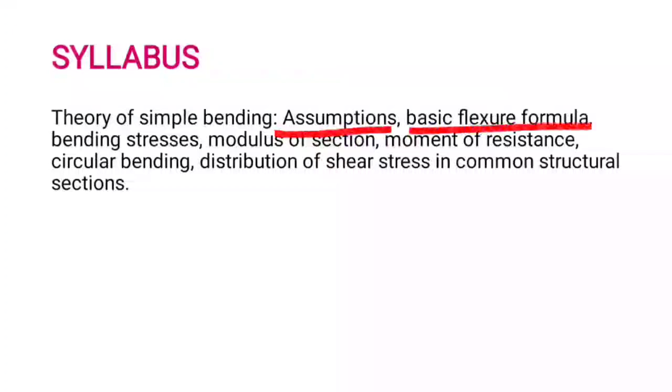ఈరోజు క్లాసులో మనం స్ట్రెంత్ ఆఫ్ మెటీరియల్స్కి సంబంధించి థియరీ ఆఫ్ సింపుల్ బెండింగ్ అనే టాపిక్ని చూద్దాం. ఈరోజు క్లాసులో మనం డిస్కస్ చేసుకునే సిలబస్ ఏంటంటే అజంప్షన్స్, బేసిక్ ఫ్లెక్చర్ ఫార్ములా, బెండింగ్ స్ట్రెస్సెస్, మోడ్యులస్ ఆఫ్ సెక్షన్, మొమెంట్ ఆఫ్ రెసిస్టెన్స్, సర్క్యులర్ బెండింగ్, డిస్ట్రిబ్యూషన్ ఆఫ్ షియర్ స్ట్రెస్ ఇన్ కామన్ స్ట్రక్చరల్ సెక్షన్స్.

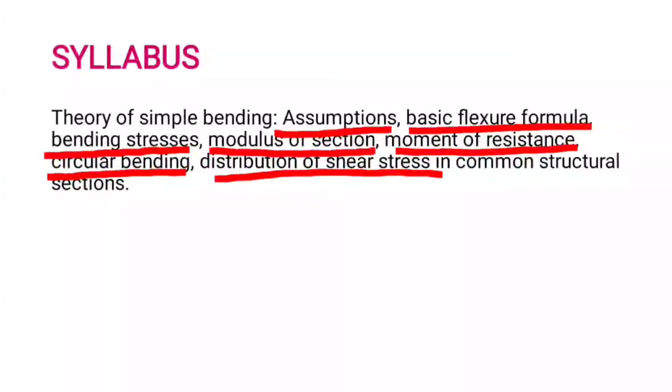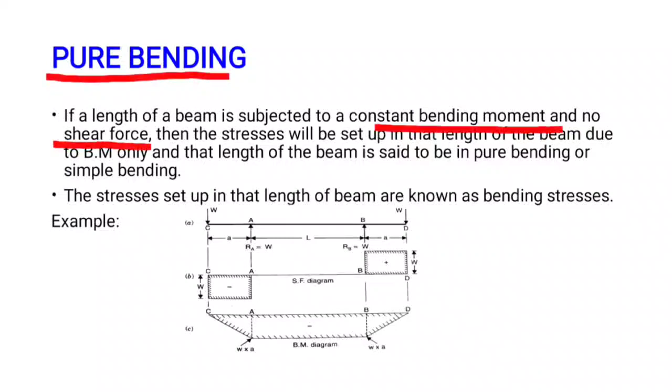అజంప్షన్స్కి వెళ్ళే ముందు ప్యూర్ బెండింగ్ అంటే ఏంటో తెలుసుకుందాం. ఇఫ్ ఏ లెంత్ ఆఫ్ బీమ్ ఈజ్ సబ్జెక్టెడ్ టు ఏ కాన్స్టెంట్ బెండింగ్ మొమెంట్ అండ్ నో షియర్ ఫోర్స్, that is shear force is 0, bending moment is constant, then the stresses will be set up in that length of beam due to bending moment only. ఆ పర్టికులర్ లెంత్ ఆఫ్ బీమ్లో మనకి స్ట్రెస్సెస్ అనేటివి బెండింగ్ మూమెంట్ వల్ల మాత్రమే డెవలప్ అవుతాయి, షియర్ ఫోర్స్ వల్ల డెవలప్ కావు, ఎందుకంటే ఆ పర్టికులర్ లెంత్ ఆఫ్ బీమ్లో షియర్ ఫోర్స్ అనేది 0. దట్ లెంత్ ఆఫ్ బీమ్ ఈజ్ సెడ్ టు బీ ఇన్ ప్యూర్ బెండింగ్ ఆర్ సింపుల్ బెండింగ్.

ఆ పర్టికులర్ లెంత్ ఆఫ్ బీమ్ని ఏమని చెప్తామంటే ప్యూర్ బెండింగ్ కండిషన్లో ఉంది లేదా సింపుల్ బెండింగ్ కండిషన్లో ఉందని చెప్తాం. స్ట్రెస్సెస్ అనేటివి మనకు బెండింగ్ మూమెంట్ వల్ల మాత్రమే డెవలప్ అవుతున్నాయి కాబట్టి వాటిని మనం బెండింగ్ స్ట్రెస్సెస్ అని అంటున్నాం.

ప్యూర్ బెండింగ్కి ఒక ఎగ్జాంపుల్ తీసుకుందాం. ఒక ఓవర్ హ్యాంగింగ్ బీమ్ తీసుకుందాం. ఓవర్ హ్యాంగింగ్ పార్ట్లో ఎడ్జెస్లో వచ్చేసరికి డబ్ల్యూ అనే లోడ్ యాక్ట్ అవుతుంది బోత్ సైడ్స్. ఆ లోడింగ్ కండిషన్కి మనం షియర్ ఫోర్స్ డయాగ్రామ్ అండ్ బెండింగ్ మూమెంట్ డయాగ్రామ్ గా ప్లాట్ చేసినట్లయితే ఇన్ ద పోర్షన్ ఏబి ద షియర్ ఫోర్స్ ఈజ్ 0, and the same portion AB for the same loading condition the bending moment is constant. So we say that the length of portion AB is under pure bending condition or simple bending condition.

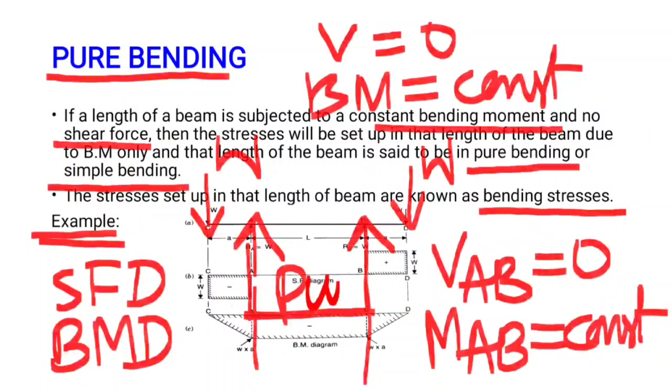అని చెప్తాం అన్నమాట. Next we see assumptions. The first assumption is the material of the beam is homogeneous and isotropic.

ఓకే, ఈ వర్డ్స్ అనేటివి మనము ఫ్రీక్వెంట్గా వింటూ ఉంటాం అన్నమాట. వాటిని అంటే హోమోజీనియస్ అంటే ఏంటి, ఐసోట్రోపిక్ అంటే ఏంటో తెలుసుకుందాం. ఎప్పుడు హోమోజీనియస్ అంటాం, ఎప్పుడు ఐసోట్రోపిక్ అంటాం అని కూడా తెలుసుకుందాం. హోమోజీనియస్ ఎప్పుడు అంటామంటే ఏ బాడీ ఈజ్ సెడ్ టు బి హోమోజీనియస్ ఇఫ్ ఇట్ హ్యాస్ ఐడెంటికల్ ప్రాపర్టీస్ at all points in identical directions.

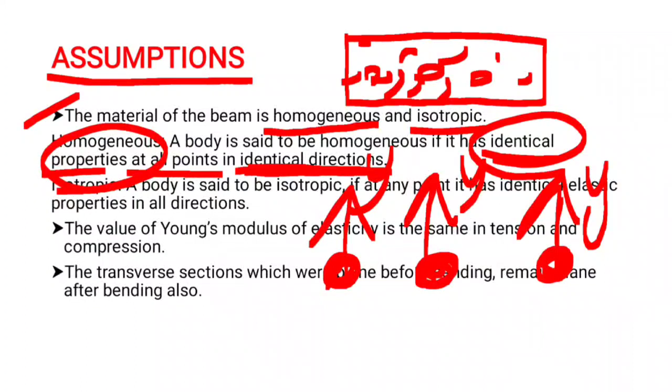Let's say this is a beam, it has a lot of points in it, a body. I consider only 2-3 points, in identical direction, that is I consider a y direction. All points exhibit identical properties, that is similar properties in similar direction. y డైరెక్షన్లో అన్ని పాయింట్స్ ఒకే ప్రాపర్టీని చూపిస్తాయి అన్నమాట. అది ఇప్పుడు x డైరెక్షన్ తీసుకుంటే x డైరెక్షన్లో కూడా ప్రాపర్టీస్ అన్నీ ఆల్ పాయింట్స్ ప్రాపర్టీస్ సేమ్గా ఉంటాయి. z డైరెక్షన్ తీసుకున్నా కానీ ఆల్ ప్రాపర్టీస్ అనేటివి సేమ్ ఉంటాయి. అప్పుడు ఆ బాడీని మనం హోమోజీనియస్ బాడీ అని చెప్తామన్నమాట.

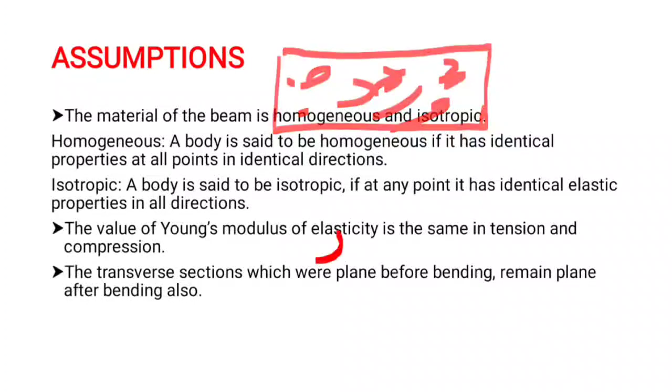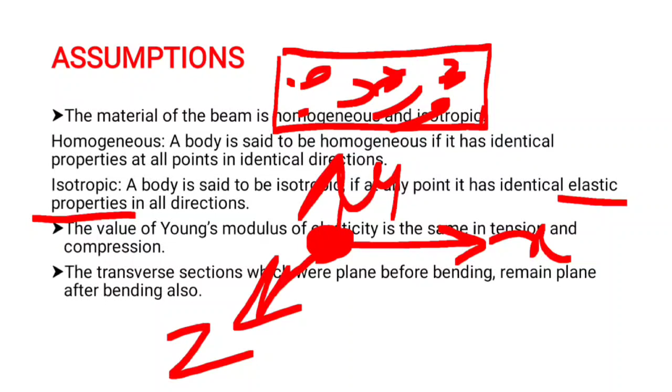ఎప్పుడు ఐసోట్రోపిక్ అంటామంటే, this is a body, it has a lot of points. At any point, I consider elastic properties in all direction, that is x direction and y direction and z direction, the elastic properties is same, then the body is said to be isotropic.

The next assumption is the value of Young's modulus of elasticity is same in tension and in compression, that is E tension, Young's modulus of elasticity in tension is equals to Young's modulus of elasticity in compression.

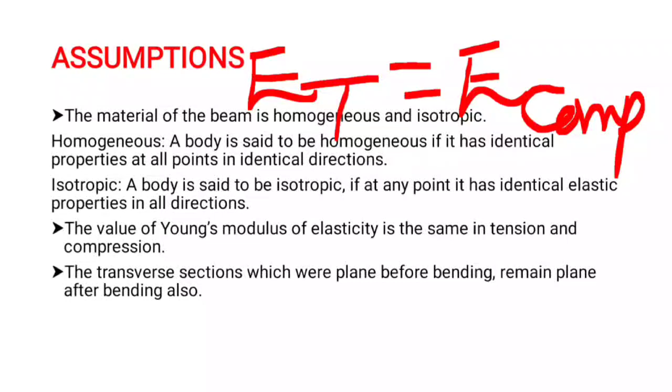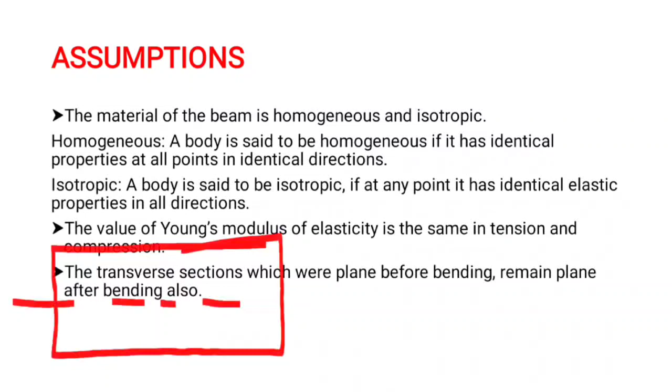The transverse section which were plane before bending remain plane after bending. For the third assumption, better understanding, we draw a figure. This is beam before bending condition, this is a transverse section, it is named as neutral axis. That neutral axis is plane before bending, remain plane after bending also.

This is bending, after bending. After bending, the upper fiber, the topmost fibers undergo compression and the bottommost fibers undergo tension. But the neutral axis is in plane condition only.

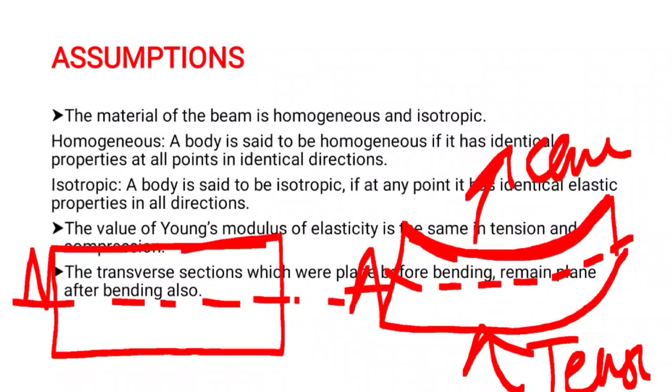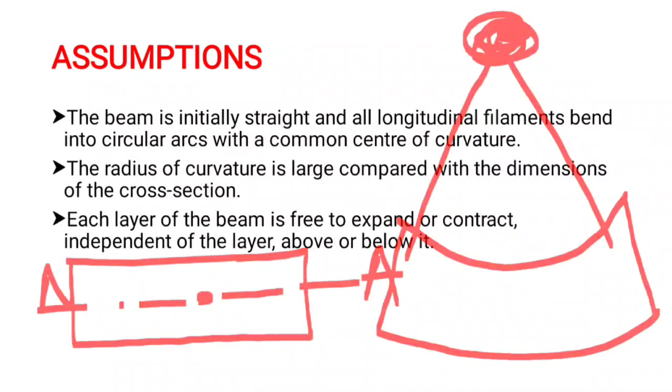The next assumption is the beam is initially straight. This is neutral axis. All longitudinal filaments bend into circular arcs like this, with a common center of curvature. This is common center of curvature. The radius will be r. We consider the radius from the neutral axis.

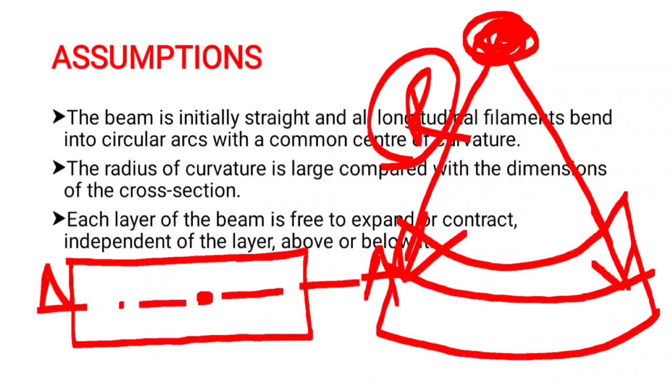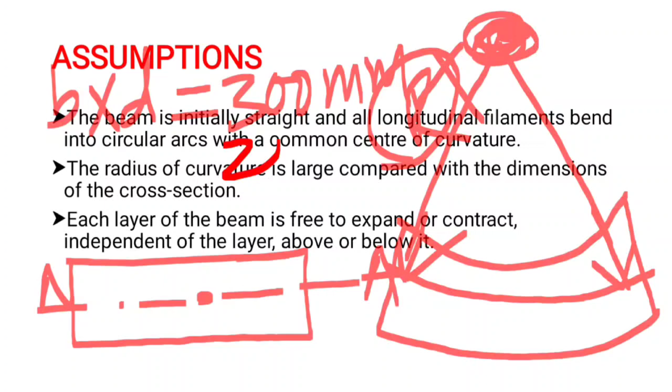The next assumption is the radius of curvature is large compared with the dimensions of the cross section. The beam dimensions, let's say B into D, is equals to 300 mm by 200 mm, but the radius will be 10 meters. Comparing the radius with the dimensions of the beam, radius is very large. That is the assumption made in bending theory.

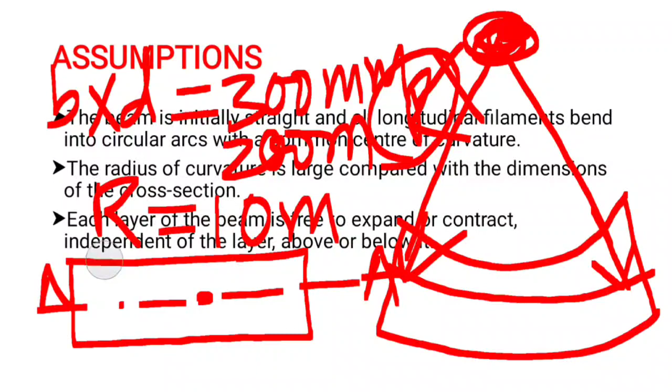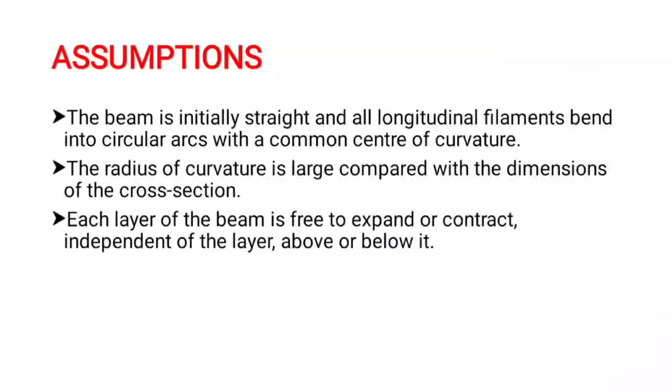The last assumption is each layer of the beam is free to expand or contract independent of the layer above or below it. Let's say this is a beam, this is a transverse section, that is neutral axis.

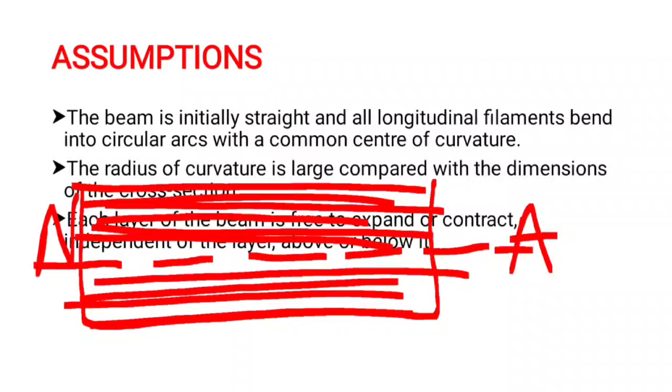The layers above the neutral axis and the layers below the neutral axis are free to expand or contract. They are not dependent on the layers above or below them; they are independent. This is the final assumption made in bending theory.

Next we see the basic flexure formula, the expression for bending theory. The flexure formula is given by M/I = sigma/y = E/R. In some textbooks, they give E/R = M/I = F/Y.

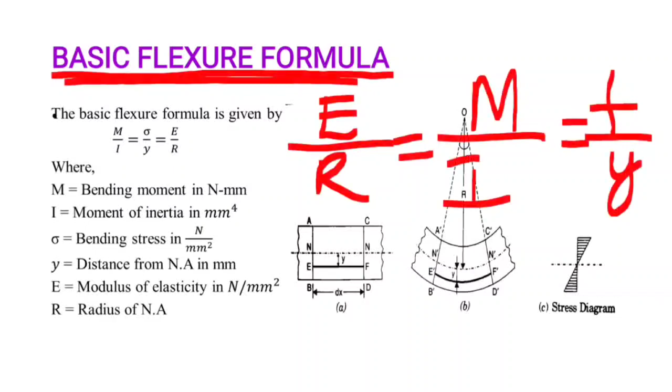Based on the diagrams provided here, this is the beam before bending condition, this is after bending condition, and the stress distribution in the beam section will be like this. Based on the figures provided, the derivation is done, but the derivation is not needed here.

Just remember the formula. A simple trick is given here to remember the formula.

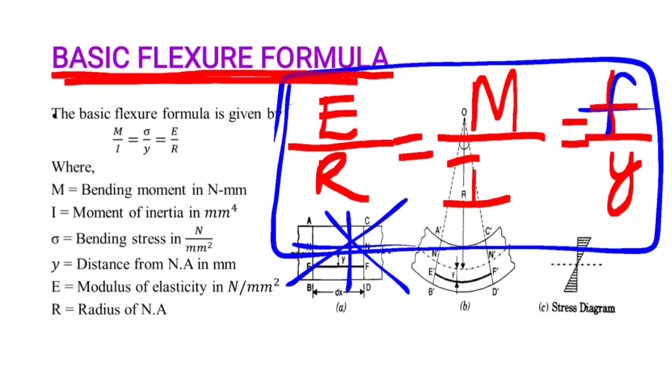For remembering the bending equation, we follow a phrase: E/R = M/I = F/y. In some textbooks F is given, in some sigma is given; anything given is nothing but the bending stress only. For this I give a simple trick: E by R, M by I, F by y. How to remember: Elizabeth Rani, may I follow you. Based on this phrase, we remember the formula: Elizabeth Rani, may I follow you.

Here the term M is bending moment, I is moment of inertia, sigma is bending stress, y is distance from the neutral axis. We observe here, this is the strip, this is the neutral axis, and from the neutral axis we measure the distance y. E is modulus of elasticity in Newton per mm square, and R is radius, this is radius.

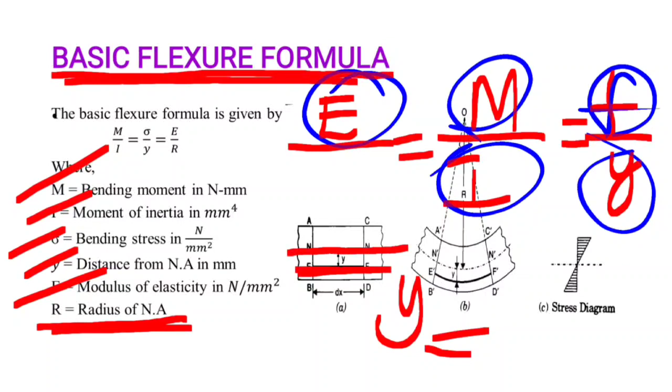Next we see bending stresses.

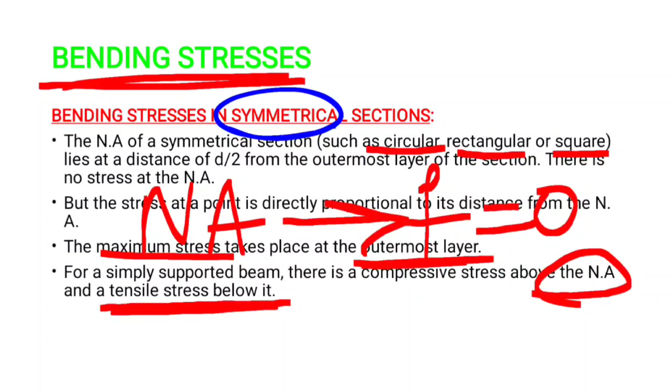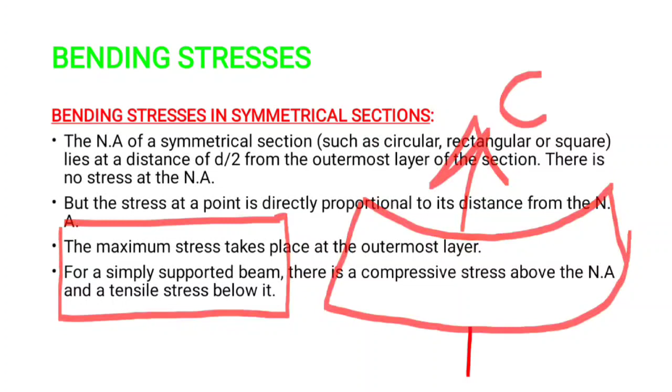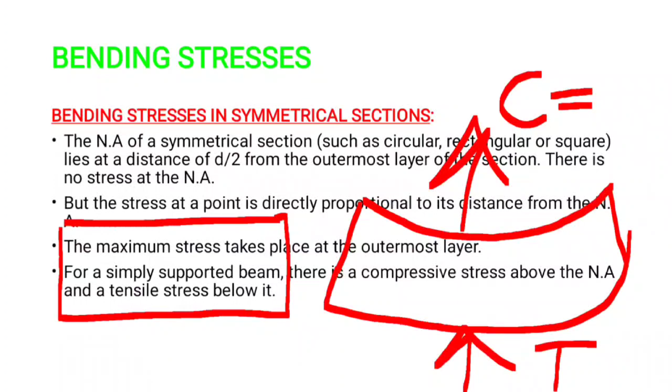Why? Because we see the bending phenomenon: this is before bending, this is after bending. The topmost fibers undergo compression, the bottommost fibers undergo tension. That's why at the top compressive stresses are developed and at the bottom tensile stresses are developed.

Let's see, this is a simply supported beam. We draw the stress distribution: this is compression, this is tension.

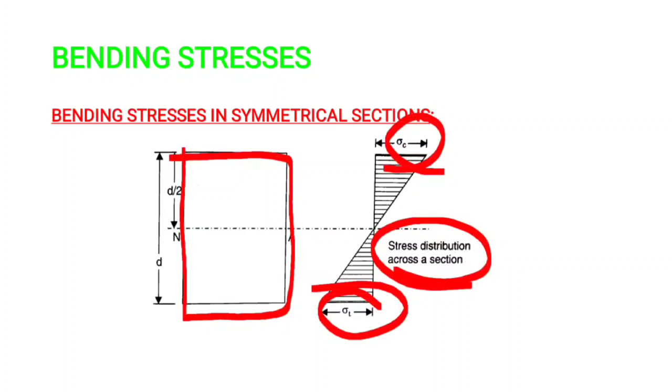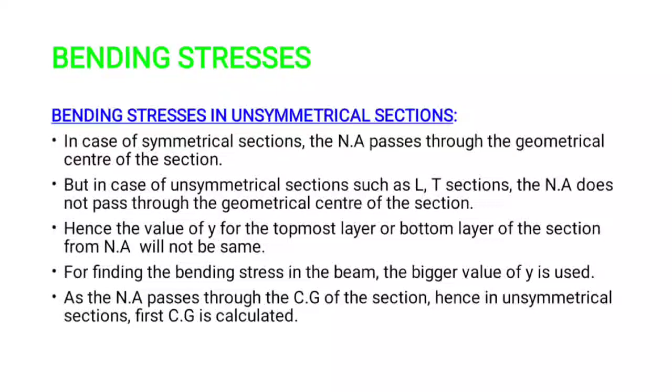Hence the value of y for the topmost layer and bottommost layer from the neutral axis will not be the same. Ymax remains the same in symmetrical sections, but in unsymmetrical sections Ymax changes and is not constant. For finding the bending stresses in the beam, the bigger value of y is used, that is Ymax.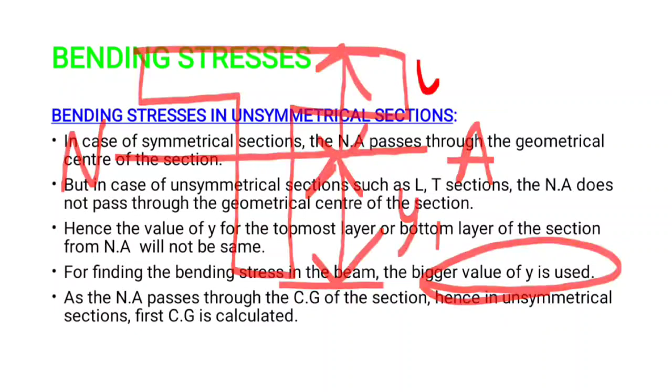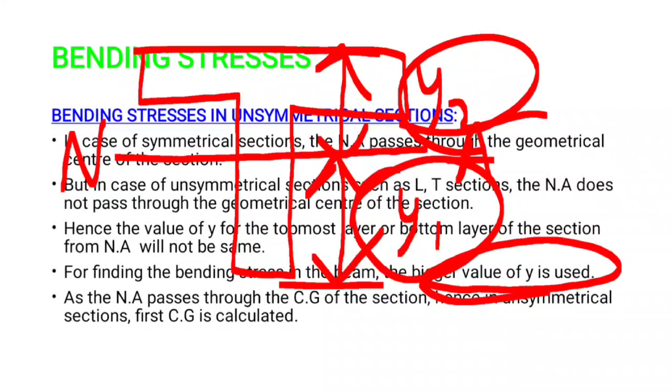We calculate, let's say this is a T section, this is the neutral axis, this is y1 and this is y2. Among these two, y1 or y2, whichever is maximum, we use that value to find the bending stresses in unsymmetrical sections.

అదే సిమెట్రికల్ సెక్షన్స్‌లో మనకు ఆ ప్రాబ్లం ఏమి ఉండదు. మనం కన్సిడర్ చేసేది y మ్యాక్సిమం, ఎందుకంటే న్యూట్రల్ యాక్సిస్ అనేది d/2 డిస్టెన్స్‌లో పాస్ అవుతుంది కాబట్టి ఎలాంటి ప్రాబ్లం ఉండదు. d/2 అబౌవ్, d/2 బిలో d/2 అనేది మనకు y max వాల్యూ వస్తుంది.

As the neutral axis passes through the center of gravity of the section, hence in unsymmetrical sections, first CG is calculated. First మనం సెంటర్ ఆఫ్ గ్రావిటీని కనుక్కున్న తర్వాత మనము y వాల్యూని కనుక్కొని, దెన్ we find the bending stresses.

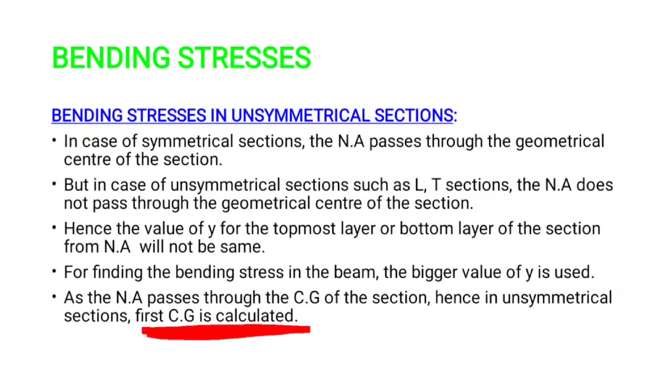సెక్షన్ మాడ్యులస్ అంటే ఏంటి చూద్దాం. సెక్షన్ మాడ్యులస్ ఎలా డిఫైన్ చేస్తామంటే, ఇట్ ఈస్ ద రేషియో ఆఫ్ మొమెంట్ ఆఫ్ ఇనర్షియా ఆఫ్ సెక్షన్ అబౌట్ న్యూట్రల్ యాక్సిస్ టు ద డిస్టెన్స్ ఆఫ్ అవుటర్‌మోస్ట్ లేయర్ ఫ్రమ్ ద న్యూట్రల్ యాక్సిస్. ఇట్ ఈస్ డినోటెడ్ బై ద సింబల్ Z.

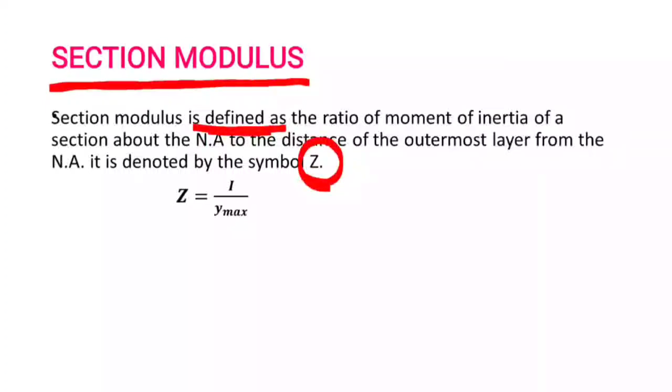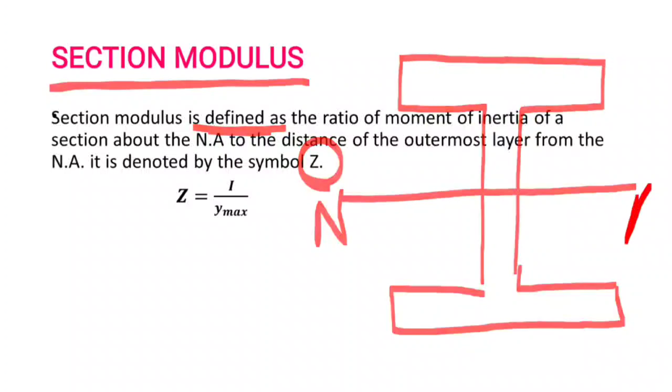ఇట్ ఈస్ నథింగ్ బట్ లెట్స్ సే ఐ సెక్షన్ తీసుకుందాం అనుకోండి. ఇట్ ఈస్ ఎ సిమెట్రికల్ ఐ సెక్షన్. For the symmetrical I section, the neutral axis is passing through the center of gravity only. This is d by 2. This d by 2 is y max. Okay, for the I section, first we calculate the moment of inertia.

We know how to calculate the moment of inertia. moment of inertia ని ఏ విధంగా కనుక్కోవాలో మనం లాస్ట్ క్లాసెస్‌లో చూసాం. మనకు moment of inertia ని కనుక్కోవడం తెలుసు. y max అనేది d by 2. మనం z కనుక్కోవాలంటే I by y max వేస్తే మనకు సెక్షన్ మాడ్యులస్ వాల్యూ వస్తుంది.

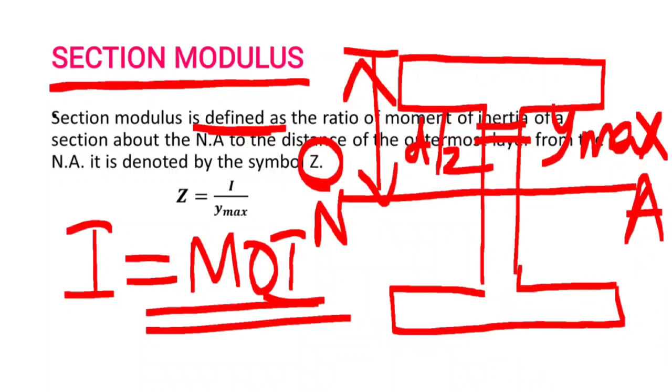సెక్షన్ మాడ్యులస్ అనేది కొన్ని సెక్షన్స్‌కి ఏ విధంగా చేంజ్ అవుతుందో చూద్దాం. ఫస్ట్ వచ్చేసి రెక్టాంగులర్ సెక్షన్‌కి. రెక్టాంగులర్ సెక్షన్ ఇది అనుకోండి, డైమెన్షన్స్ బ్రెడ్త్ b, డెప్త్ d. మనము మొమెంట్ ఆఫ్ ఇనర్షియా కనుక్కునేటప్పుడు ఫార్ములా రెక్టాంగులర్ సెక్షన్‌కి bd³/12 అని చెప్పుకున్నాం.

ఓకే, y max వచ్చేసి d by 2. So bd³/12 divided by d by 2, we get bd²/6. This is the section modulus for rectangular section.

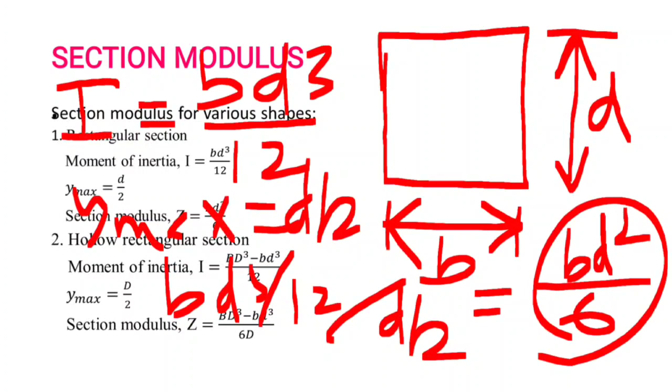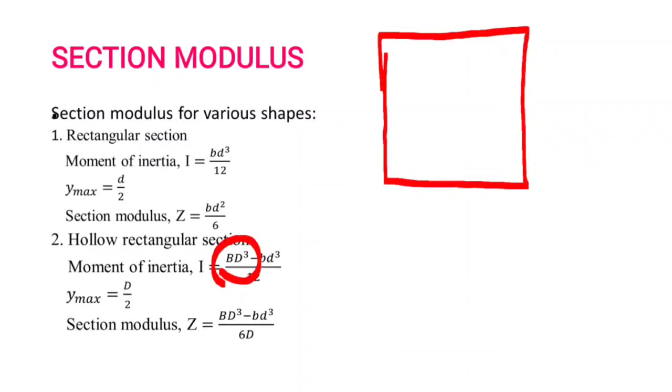Similarly, for hollow rectangular section, we calculate section modulus. I value will be BD³ minus bd³/12. This is capital, let's say this is hollow, right? Outermost dimensions are capital B, this is capital D. This value will be small b, this value will be small d.

We did not consider the hollow portion, we consider only the solid portion. That's why moment of inertia we calculated for the solid portion, we remove the hollow portion. Moment of inertia will be BD³ minus bd³ divided by 12. Y max will be capital D by 2. Section modulus will be I by y max. We get BD³ minus bd³ divided by 6D as the section modulus for hollow rectangular section.

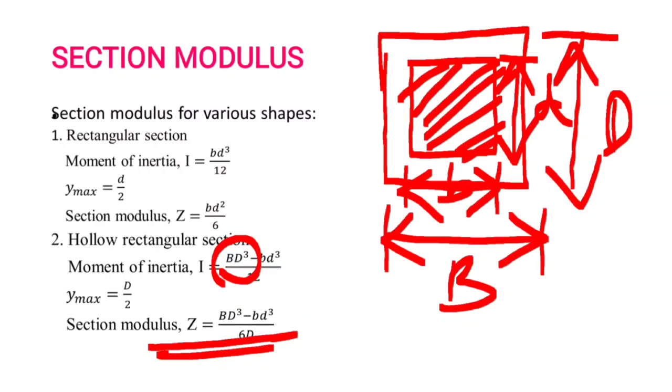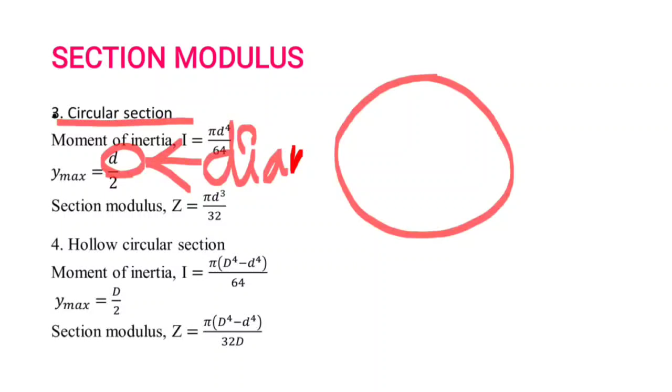Next we see the circular section. In the rectangular section, D refers to the depth; in this case, D refers to the diameter. For the circular section, d is the diameter of the circle. Then the moment of inertia, we know that moment of inertia is equal to pi d power 4 by 64.

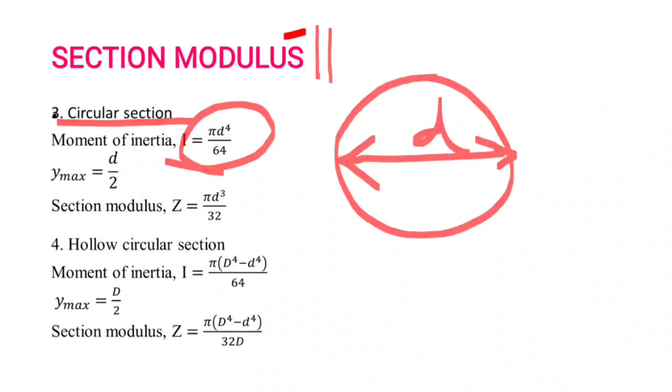Y max will be d by 2. Section modulus z is equal to I by y max, that is equal to pi d power 4 divided by 64 divided by d by 2. We get pi d³/32 is the section modulus z value for the circular section.

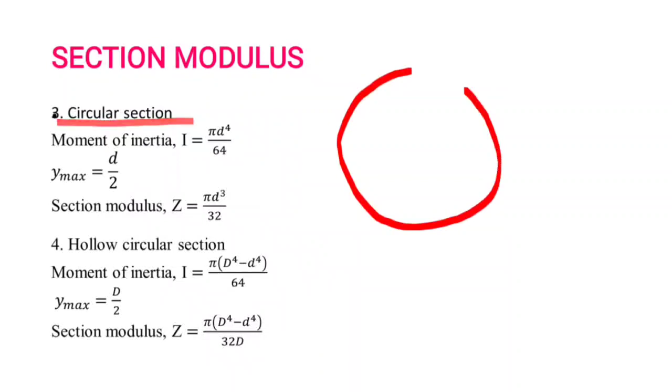In case of hollow circular section, in the same manner as hollow rectangular section, we calculate. This is the circle, this is another circle. This diameter will be small d, this diameter will be capital D. The moment of inertia will be pi times capital D power 4 minus small d power 4 divided by 64.

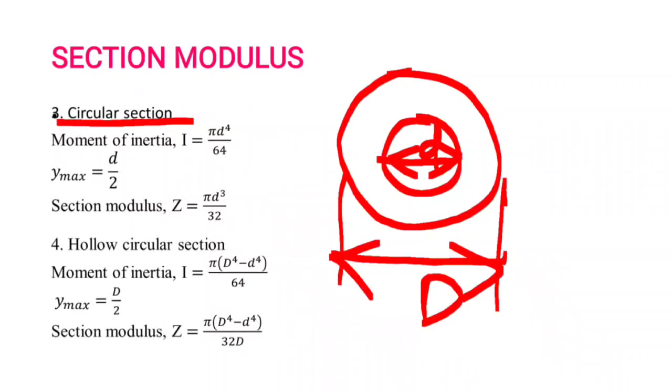Y max will be large diameter, that is capital D, divided by 2. The section modulus will be z is equal to I by y max. We get pi times D power 4 minus small d power 4 divided by 32D.

Okay, next we see strength of a section. Strength of section is nothing but moment of inertia, moment of resistance. Moment of resistance offered by the section is given by,

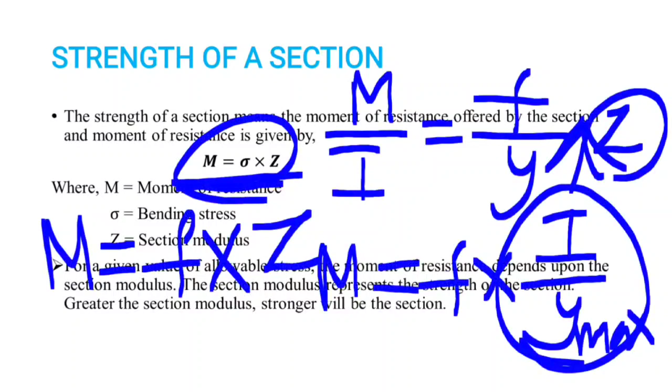we have the equation as m by I is equal to f by y. So m is equal to f into I by y. If y is maximum, then it is called as section modulus. Then the moment of resistance is given by bending stress times section modulus. This is the formula. I hope the formula is clear, where m is moment of resistance, sigma or f is bending stress, z is section modulus.

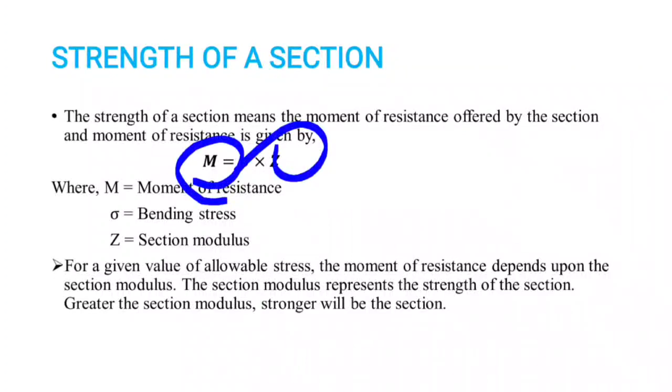For a given value of allowable stress, the moment of resistance depends on the section modulus. The section modulus represents the strength of section. Greater the section modulus, stronger will be the section. This is directly proportional, so if Z is more, the strength, that is moment of resistance, is more.

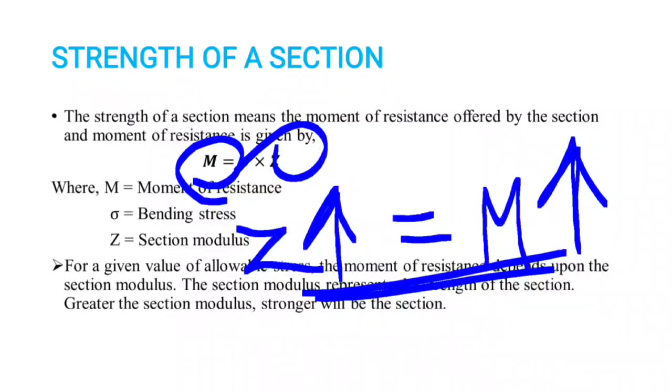Next we see shear stress. Shear stress produced in a beam which is subjected to shear force is known as the shear stresses.

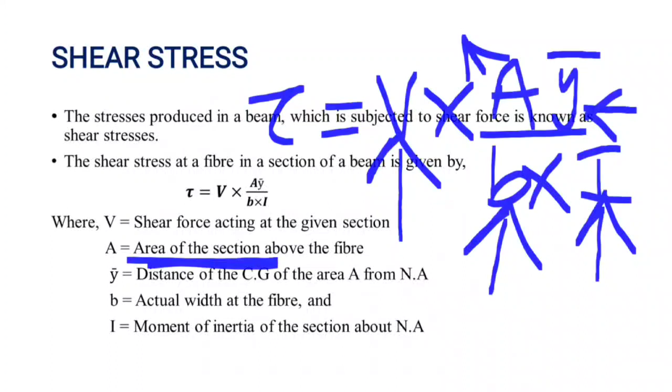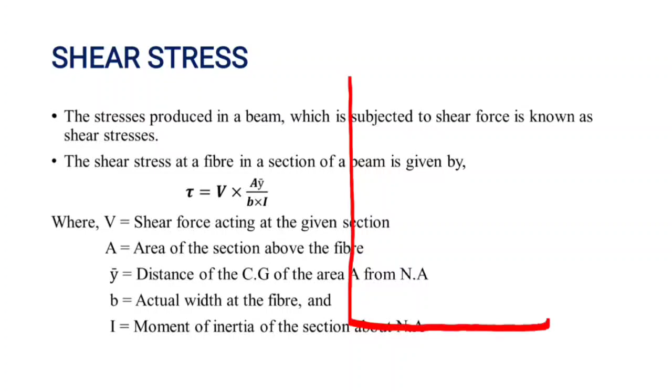Let's say this is a rectangular section. This is the center of gravity. I consider this portion, and the area of the section above the fiber is the area we consider. Y-bar is the distance from this center of gravity to the hatched area's center of gravity. This is the basic formula for shear stress.

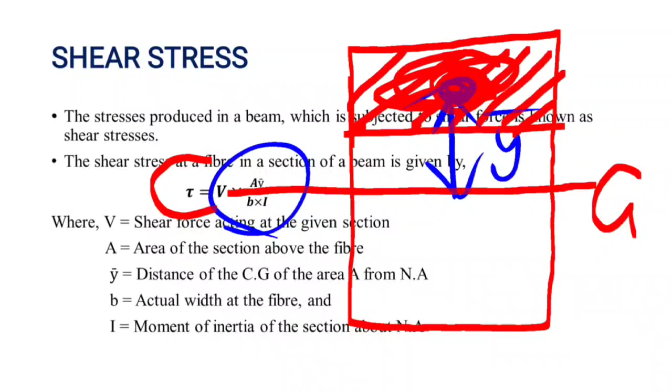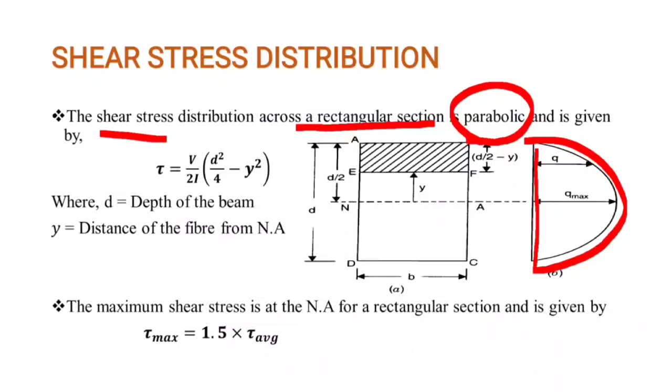We see some common sections. First, the shear stress distribution for a rectangular section. In the rectangular section, the shear stress distribution is parabolic. The formula is given by tau equals V by 2I times d square by 4 minus y square. This is the formula for a rectangular section.

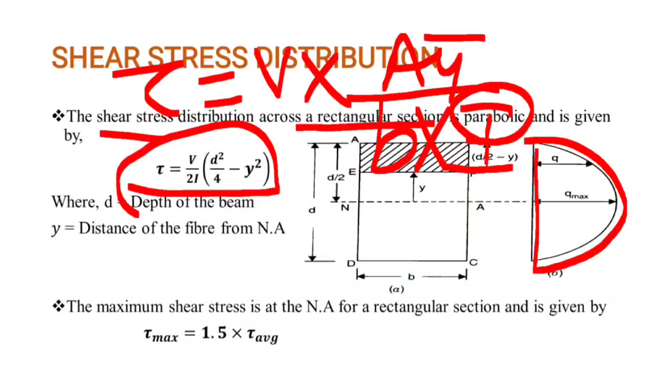The basic formula is tau equals V into A y-bar by B into I. From that formula we derived the formula for rectangular sections, where D is the depth of the beam, and y is the distance of the fiber from the neutral axis.

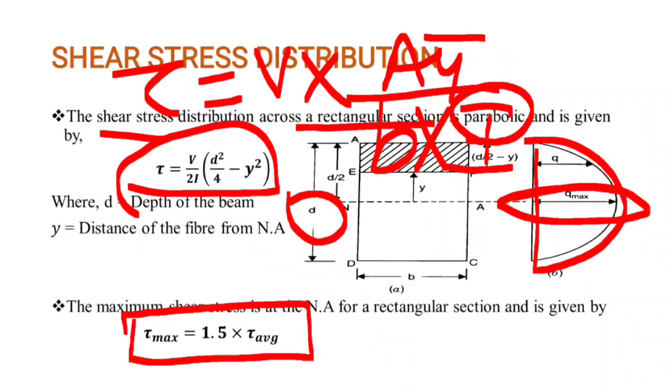For the rectangular section, tau max is given by 1.5 times tau average. That is, maximum shear stress equals 1.5 times the average shear stress. This is the formula for rectangular sections.

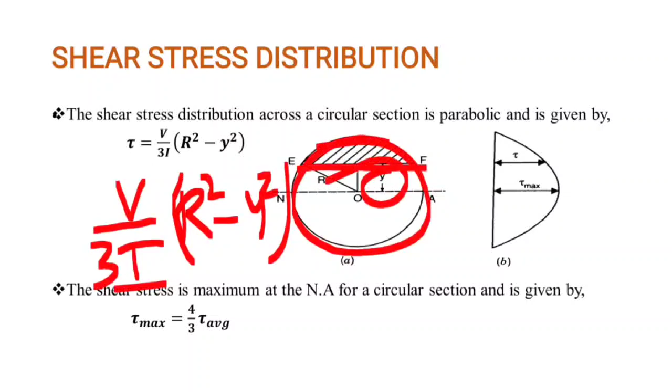For the circular section, this is a circle. I consider a strip, that is EF, a section EF, at distance Y. The formula for shear stress is V by 3I times capital R square minus Y square. Capital R is the radius of the circle, and Y is the distance from the neutral axis.

The distribution will be circular, parabola only, with the maximum at the neutral axis. For this case, the maximum shear stress is given by tau max equals 4 by 3 of tau average. That is, maximum shear stress is 4 by 3 times the average shear stress.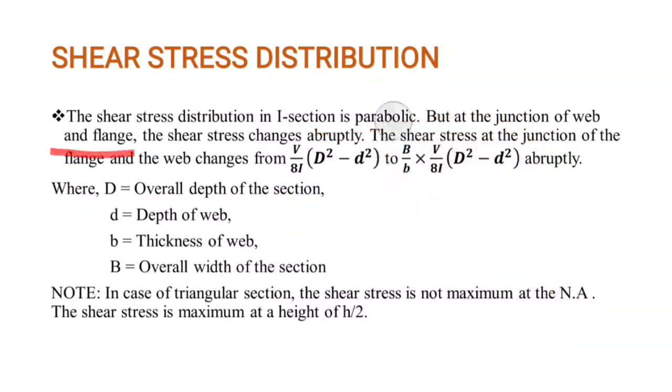In a triangular section, the shear stress is not maximum at the neutral axis. Why? Because this is a triangular section.

But we see the centroid will be at h by 3 distance from the base, or 2/3 of h from the apex point.

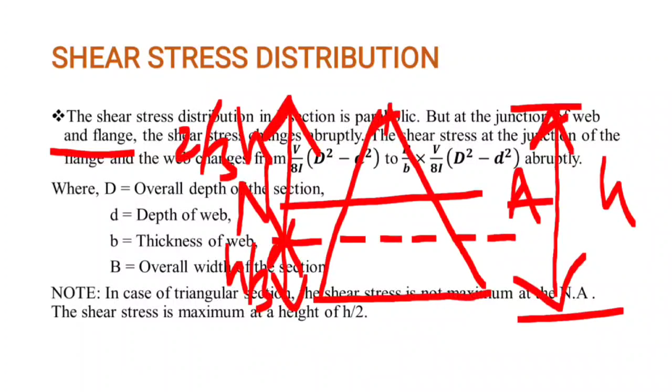This is the shear stress distribution in I sections. For the flange and web junctions, the shear stress changes abruptly.